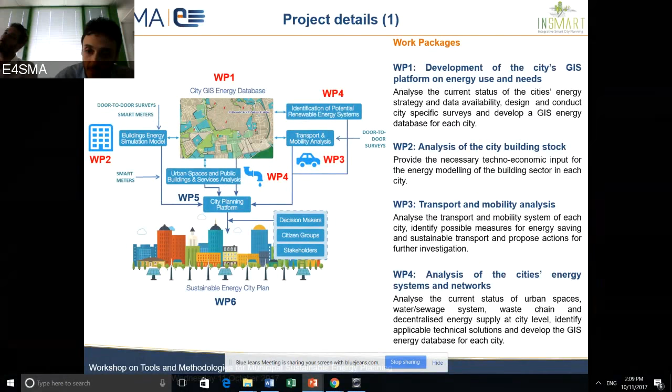All this information is also used by the core of the framework, which is a city planning platform, aiming at exploring the dynamics of the city, making use of all the data provided and collected by the previous work packages. And this city planning platform is mainly based on 2 techniques. The first one is an optimization, which aims to explore future rational development of the city, coupled with a multi-criteria decision analysis.

This city planning platform provides a series of quantitative data, which are then used to prepare a midterm implementation action plan as a final outcome of the project.

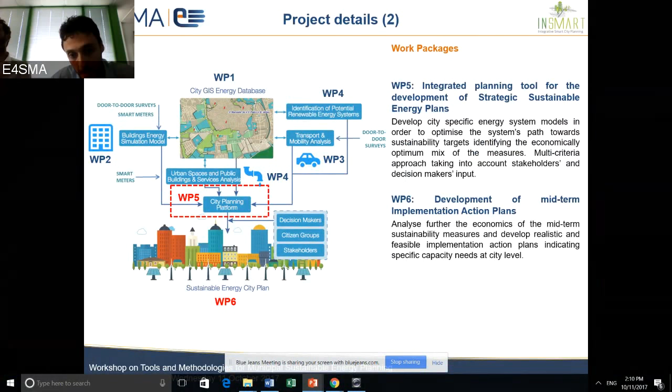Once the methodology was established, we applied this methodology in the framework of the project to 4 cities, Nottingham, Évora, Cesena, and Trikala, in 4 different countries of the EU. I just want to stress one key point here: the municipalities and the city councils were in fact on board in the project. So they participated from the very beginning in the main steps of the project itself.

A few more details about the methodology and the framework. The spatial analysis, in our opinion, is absolutely crucial when we want to plan at city level. So instead of working with a single point in space, like many standard approaches generally do, we decided to organize the geographical representation in terms of zones. And we decided to organize the zones within the municipality, trying to understand what kind of homogeneous buildings, for example, or homogeneous characteristics are present in the zone.

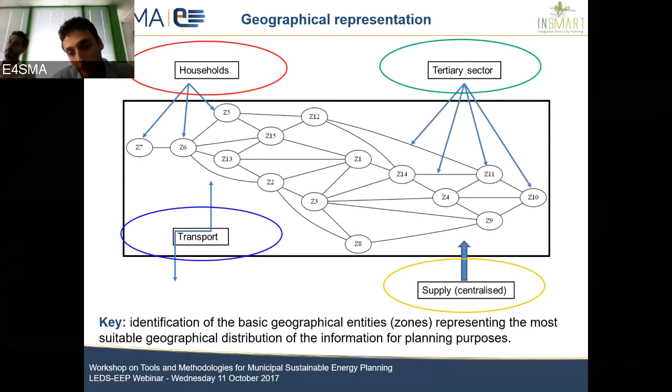You see here an example of 15 zones where we located the buildings, the residential buildings and the tertiary sector. And we also located and represented the transport sector. So the 2 main sectors of this project and our analysis are basically the building sector and transport. Everything related to the bulk production of electricity and heat, so the supply and the centralized production of energy, is seen as an input from an area external to the municipality.

Making use of some database and also door-to-door surveys, what we did was in fact to start describing in a well-precise manner all the key characteristics of the building stock. You see here some of the information. We were able to describe the dwelling stock by zone and by typology, for example, flat, detached, semi-detached, and terraced. The heating system stock, again by zone and by fuel.

The dwelling stock by period of construction, meaning that we were able to identify different characteristics of the shell of the building, which basically drive the consumption of these processes, and something similar for all the pure electrical appliances and devices in the building. You see here this chart showing the penetration of the most important appliances per dwelling. So starting from some data collection, we then calibrated this set of information into a reference for the framework, and then we simulated some alternative options.

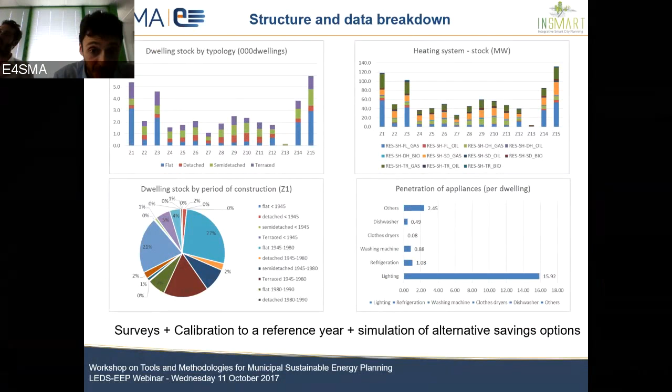We used also door-to-door surveys to characterize the transport sector. So the idea was to analyze the existing and the future private-public demand of transportation by modes, meaning, for example, motorcycles or private cars or buses or trains. And the idea was to try to understand better the behavior of people from zone to zone, since we have this breakdown of the municipality into zones.

Just to give you an example, you see this tall blue bar in the very center of this chart. This is an area of destination for many trips of people because it's a place of shops and restaurants and is in the very center of the city. So the idea was to try to track the movements of people from zone to zone in the municipality.

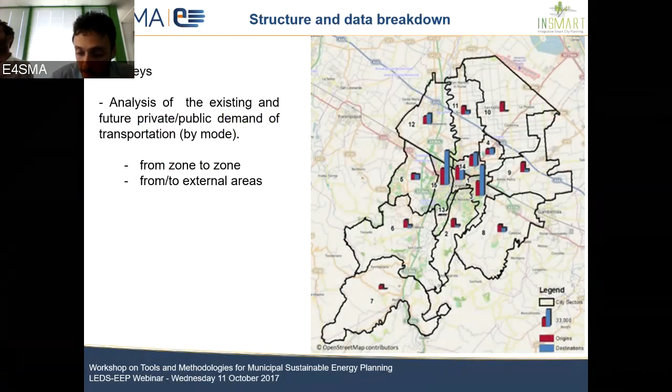And one other very important characteristic of the framework that we tried to design and to use was this idea of integration. This chart shows an example of integration according to our design. Many times, the different energy services and the different sectors are managed in a pretty standalone manner. We don't believe this works well. So what we did was to try to aggregate all the sectors, or at least all the energy services, which actually are demanded by the same agent or by the same player in the municipality, in one single problem.

This chart shows, for example, that the single agent called household is responsible for everything related to the technology substitution in terms of heating technologies, cooling technologies, private transport demand, as well as the pure electrical uses. And also this allows us to simulate some budget constraints in order to better keep track of the actual energy efficiency improvement of the city.

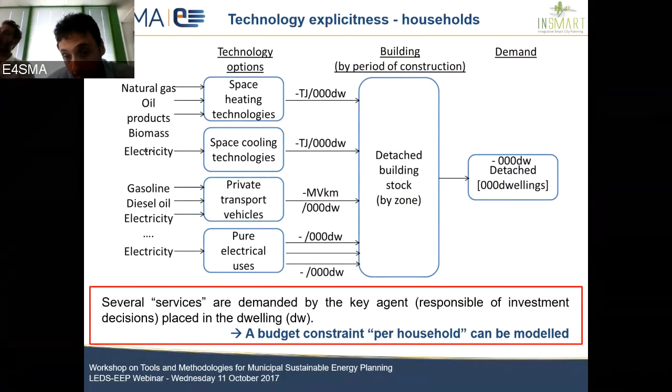This general description is just to introduce what is the real goal of this framework. The real goal of this framework was basically to explore the dynamics of the city energy system. And we did this exploration making use of a standard scenario analysis, but in this case an integrated scenario analysis, meaning that we designed a reference projection of the city energy system, and then we calculated some alternative dynamics of such a system, making use of different actions or measures or targets, aiming at representing, in fact, alternative planning hypotheses for decision makers.

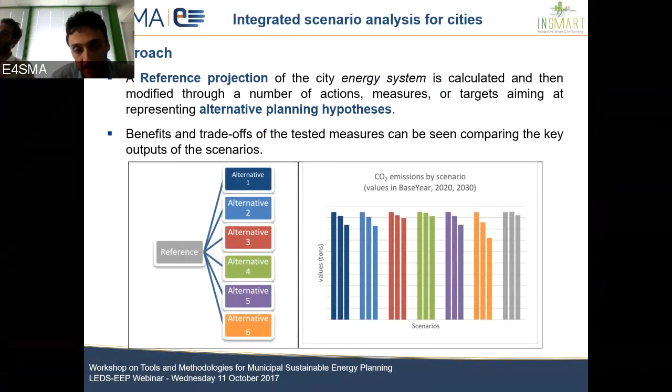And the possibility to compare the outcomes, so the quantitative data provided by these alternative planning hypotheses, like, for example, for CO2, provides a set of information for the decision makers. But what kind of outcomes can we generate making use of this framework? You see here some examples. We can produce savings by components. For example, the savings due to the refurbishment of the building in terms of walls or in terms of replacement of windows and glasses.

Or the savings by building typology in one specific point in time. So for example, in 2020, the share of savings due to the energy efficiency measures in the flat or in the semi-detached. At the same time, we can keep track of electricity consumption by zone and the dynamic of such a variable, and many other quantitative indicators, like, for example, costs, emissions, consumption profile within the year, in order, for example, to keep track of the load shape of electricity and heat consumption, a set of quantitative data to provide information for the local decision maker.

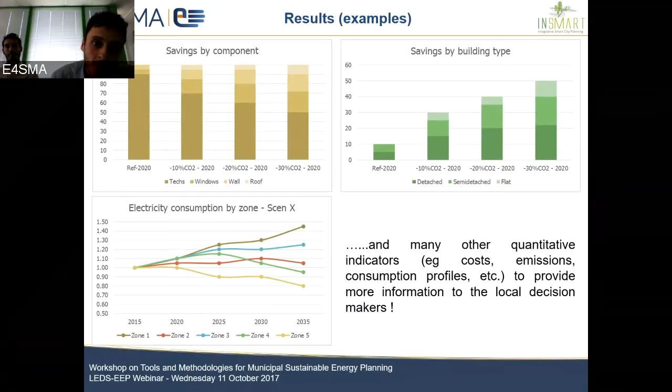Once we generate all this quantitative information for all the alternative planning hypotheses that we design, we then involve the stakeholders again in a multi-criteria decision analysis, asking them to identify the criteria against which to compare the alternative planning hypotheses and the preferences that they have for the criteria. In the end, what we obtain by this combination of methodologies is a unique profile which is well ranked in this ranking exercise and can actually be used as a basis for the preparation of the Sustainable Energy Action Plan.

Let me just clarify again one point. The stakeholder participation is key in the framework, in the sense the stakeholders are engaged in the design of the alternative planning hypothesis because they know how to and what kind of measures they want to test. They are also engaged in the definition of criteria against which all the alternatives can be compared. And they are also obviously engaged in the selection of the preferences of all of these criteria. So as you can see, the stakeholder participation is really key in this framework.

To conclude, two slides. The first one aims to give you an idea about the key differences between the standard sustainable energy action plan approach and the InSMART approach, which was designed in the project, and is in fact the framework that we want to share with you.

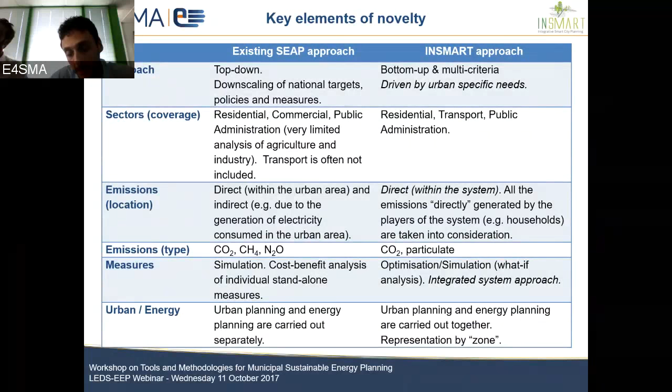And this is my final key message for you. The framework is a general integrated planning approach that can be applied to a variety of case studies, no matter what the size of the municipality is in principle, and can use different tools, not only the tools that Alessandro is going to present now, as long as the principles of the method are maintained, meaning that all these key characteristics listed in this table must be maintained in order to keep the framework self-consistent.

Now, I just invite Alessandro to continue the presentation.

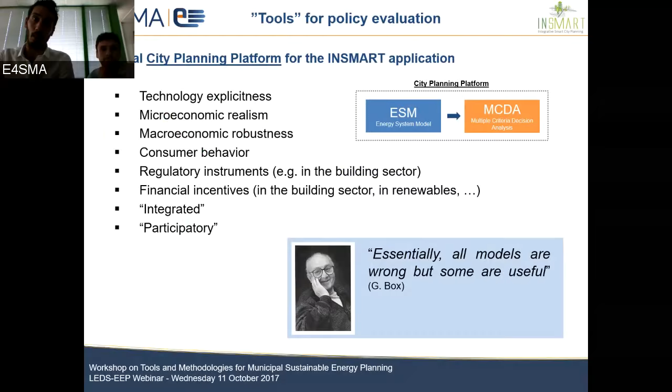So basically, the first tool, as we said, is a technology explicit model which can be used to explore the evolution of energy and environmental variables in the urban area. This tool has been developed in this case with the TIMES modeling framework, which can be used to develop applications for any case study and any size of cities and areas. The key characteristic of this framework is, first of all, that it approaches planning in an integrated way, modeling the entire energy system, and it combines both the technical, engineering part and the economic approaches to the system.

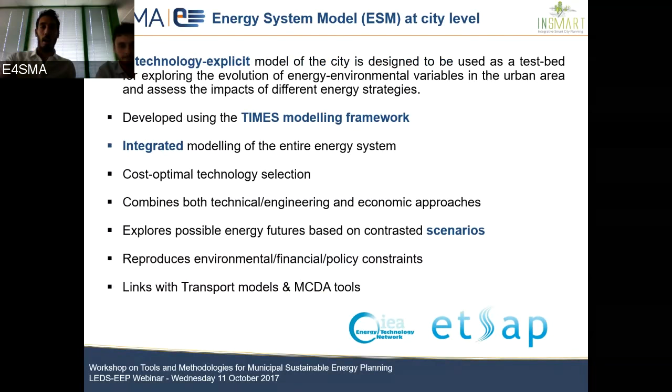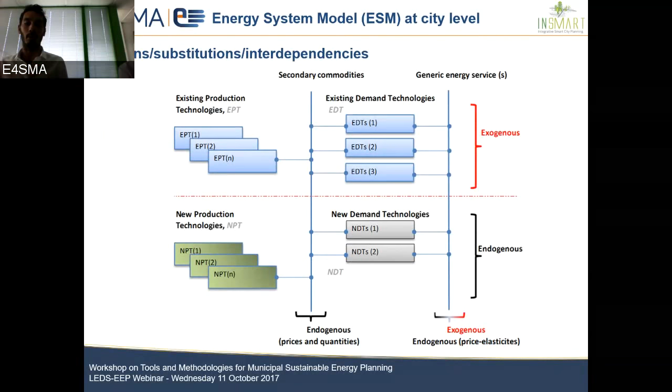Just to provide you a very rough idea of how an energy system model represents the urban area: the system is represented by a network of technologies and energy flows that are linked all together, and the approach is to assess your system in a comprehensive way. In this way, you can keep track in an integrated way of all the interdependencies of the different commodity flows, the technologies, and all the possible competitions between, for example, different sectors. So, for example, the impact of a certain action in a specific sector on other sectors, or competing technologies, such as currently existing technologies versus other possible technology options.

Supporting this type of tool, we decided to apply a multiple criteria decision analysis. The reason that underpins this decision is that a decision maker would always like to define and select the best strategy for the city. However, these types of decisions are always driven by individual preferences, so an absolute best alternative usually does not exist. And this is why an MCDA tool can help you try to identify the best compromise decision among all the possible options.

And another key point, which I think is an added value for including this type of analysis in such a planning exercise, is that it involves the participation of the stakeholders, in particular in the identification of the criteria to evaluate alternative planning hypotheses, and as well to evaluate these criteria based on the perceptions and the priorities of stakeholders.

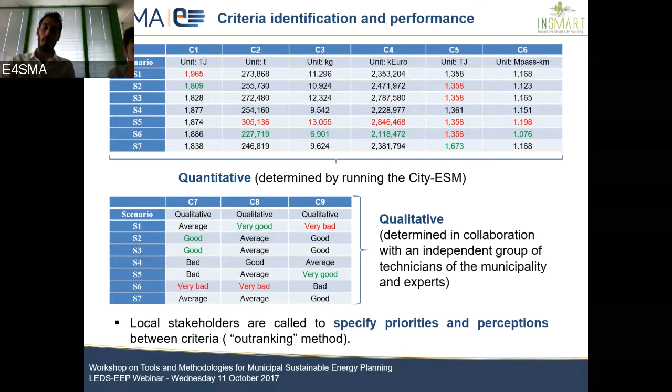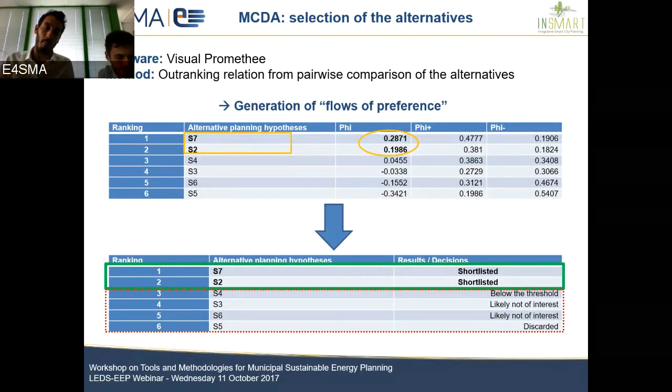So the final output of this type of tool, I think, is very powerful, because among a set of possible alternative planning hypotheses, this type of tool is able to provide you a ranking of these hypotheses, and basically it can drive you to the definition and the short list of the set of planning hypotheses that could be the starting point, the basis for any planning and decision support, any planning document for the urban area.

So concluding, I just showed you very briefly a few of the key elements of the tool that have been applied to this specific project. And if you also followed the previous webinar, I think you noticed that a large number of possible approaches and tools for energy planning are available. However, I think it's important to underline that before defining which tool to use, this decision should always be driven by the type of planning and policy questions that you are aiming to answer. This should always be the starting point for any planning exercise.

So this small presentation was basically to provide you some introduction about the framework and the tool used in our project. However, if you are still interested in some more details, for example the real-world application of this modeling framework, I suggest you join us in our next webinar on October 25th, in which we are going to explore the application for 3 of the 4 case studies of our project. Myself, Rocco, and Luis Diaz from University of Lisbon will go more into detail about these 3 case studies. So this was the end of our presentation.